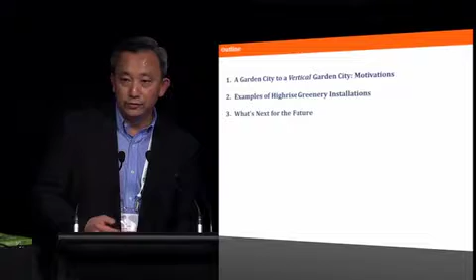What I'm going to talk about next is to share a few more motivating factors why Singapore is pushing for the greening of the city. I'll next talk about some examples of what I think are good examples of high-rise greening in Singapore, and lastly I'll share some perspectives of what I think the future could hold for high-rise greening in Singapore.

Now, Singapore to me is unusually green. I say it's unusually green because Singapore has a very tiny landmass but a very high population - current population is 5.5 million. In fact, we're talking about a population of 6.9 million by 2030, and some even suggest we could hit 10 million by 2050. It's a huge increase in population.

The other pervasive feature of Singapore is roadside planting. We estimated that more than 95% of all roads are planted with trees, large and small. This is a very effective way of making sure the green ambience is pervasive, because roads are everywhere in Singapore. So if you green up your roads, you get a very green atmosphere within the city.

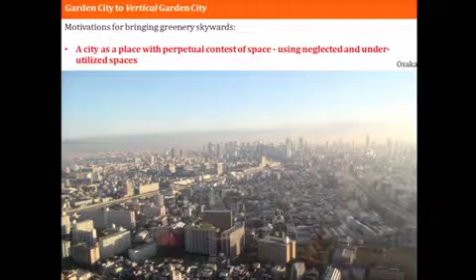I mentioned the need to overlay different functions on a roof. This is a picture I took in Osaka, probably similar to many cities. Osaka is a megacity, and you can see one example of a green roof on top of a building, but many buildings still have very bare rooftops. It's the same in Singapore, and perhaps in many large cities worldwide.

So there are a lot of spaces we can use. I remember Stephen Peck wrote many years ago that the rooftop is the last urban frontier. That's a space that's underutilized, and there's a lot of focus on how we can use it more effectively.

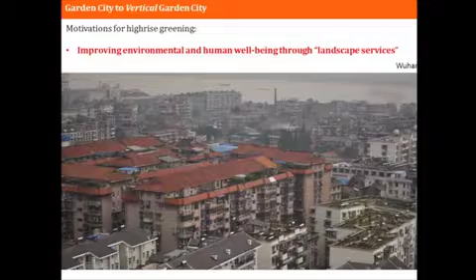The other reason we're pushing for high-rise greening is really an indirect benefit of green. It delivers a suite of ecosystem services, which I tend to call landscape services—useful to improve the environment and contribute to human well-being, both physiologically and psychologically. This is a prominent and important objective, complementing what we have on the ground to use green spaces as a medium to improve the environment and human well-being.

The last reason, which is important for Singapore, is that we are trying to correct past mistakes. Singapore, before it was founded as a British colony, used to be covered almost 100% with primary rainforests.

And thanks to the mismanagement of our colonial masters, within 100 years from the founding of Singapore, we lost more than 90% of its primary forests. By now, Singapore has only about 0.3% of its primary forest left intact. Obviously, with that tremendous loss of primary forests, we had a great, catastrophic extinction of biodiversity within Singapore. The issue now is to conserve what we have by safeguarding the nature reserve, because that's still a rich source of biodiversity.

But the city and the built-up area—and I listened to a presentation on biodiversity conservation and enhancement with green roofs in the earlier session—the city is also looked upon as a space where we can introduce habitats to conserve and enhance biodiversity for the whole city. This is a very strong factor that is going on for Singapore at the moment.

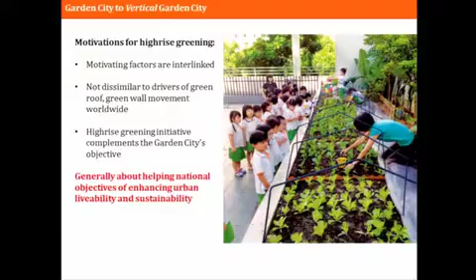So the motivating factors I have presented individually, but they are obviously interlinked. If we scan the range of driving factors that push the green roof and green wall movement worldwide, they are largely the same. The priority of importance given to factors may differ, but I think the suite of factors is generally well understood.

So in short, greening Singapore upwards in a high-rise environment is really a means to help achieve the national objectives of urban sustainability and livability.

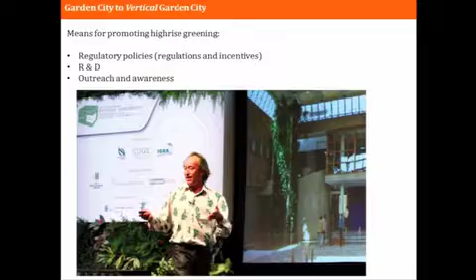Now, how do we do it? A range of policies and incentives have been put in place. It's both a carrot and a stick approach—Michael spoke about it yesterday, same as Faisal. We also, in the initial years of pushing for this, had to conduct a range of research to look at how we can contextualize benefits to Singapore's conditions, and also to overcome some of the technical barriers to implementation.

Now, the other way is outreach and awareness. Those of you who heard Patrick Blanc's presentation will probably agree that he speaks with conviction and passion, and it's very useful to have a person like him to influence politicians. We invited him, for instance, to speak in Singapore in 2011, and quite immediately after that, almost literally, he was hijacked by the largest property developer in Singapore—that's how he got his first commission project, which Michael talked about yesterday. So it's useful to bring people who can inspire and influence, to get to influence politicians.

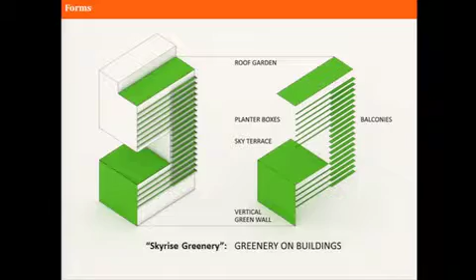Now, what is high-rise greening, or in Singapore we call it sky-rise greening? It's actually a unique term, but Hong Kong copied it and started using sky-rise greening too. The term originated in 1992 when we first held an exhibition to demonstrate greening of the high-rise environment. High-rise greening in our terms refers to green walls, sky terraces inserted in intermediate floors within buildings, planter boxes, balconies, and of course rooftops. That's what I mean by high-rise greening.

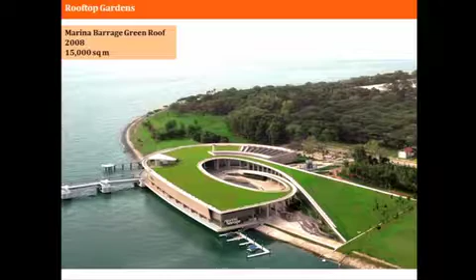So I'll show some examples. This is an example I talk about—15,000 square meters, large, implemented in 2008. A fantastic public open space—you can see the ramp that leads up to the top of the roof, so it's a very attractive place. The palms I mentioned are housed within this facility.

The engineers were terrified that with the kind of torrential downpour we have in Singapore, the slope will fail. We pushed through, and I'm very glad that, in fact, it's coming to 10 years, and nothing has happened. It's still a green roof, performing pretty well, and students can walk up the roof to their classrooms.

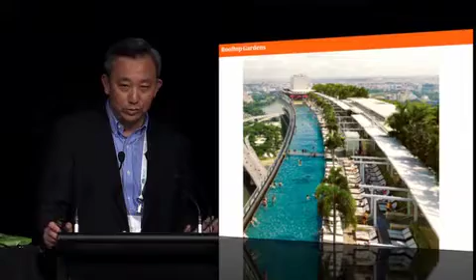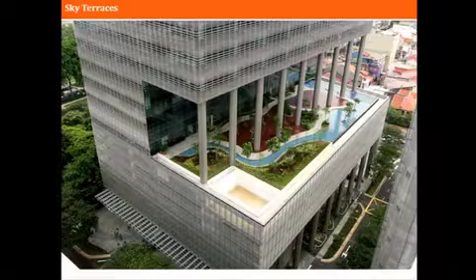This is quite a good idea because at lunchtime, it is hot and sweaty in Singapore. The rooftop garden is not a space that we want to use. So a somewhat sheltered environment is much better, and this is proliferating in Singapore at the moment. Okay, an example of what it looks like. Unfortunately, I think some spaces have turned into a secret smoking corner.

And he has also made sure that he has allocated some space for a community garden for the residents who are staying within the vicinity to use. So it's a fantastic place.

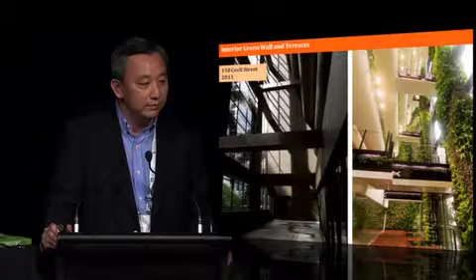But once the green has been put in, it becomes a very desirable place, and the building owner could recoup a lot of his investments from just tenants who are facing the green atrium. So it's a good example of how, if you implement green in a strategic fashion, you can have some business returns.

And apparently, as well, Facebook has an operation in Singapore. So the co-founder of Facebook, I can't remember his name. There are a lot of rich and famous celebrities in Singapore now. He liked it so much, so he commissioned the landscape contractor to do a similar wall on top of his office right at the top of the building.

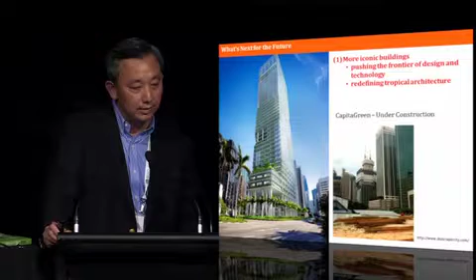So there's a movement going on now, and this is one example of a building under construction, CapitaGreen, with green planters and balconies, and also sky terraces that are inserted in different floors. This is designed by Japanese architect Toyo Ito. In fact, Toyo Ito said this is the office of the future, one big tree.

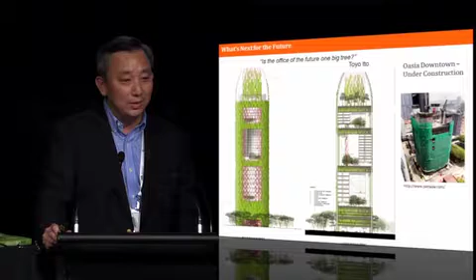And I think his quote is perhaps more suitable for this building, again designed by our local architecture firm WOHA. It's fascinating. I am not sure how the landscape contractor, who is also here in the conference, I have not seen him today, is going to implement this, but I think it's fascinating to see what the outcome will be like. Right? And you can see the building that's being constructed over here.

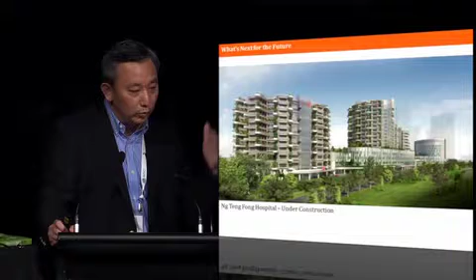Another hospital that's coming up, perhaps to be completed and commissioned within the next 6 months, is the Ng Teng Fong Hospital. Again, the idea that green is important for the recuperative function has been gaining acceptance in our hospital industry. And the CEO here wanted to make sure that every patient in the hospital would have a view of greenery when he looks out the window. Right? So this was done by inserting lots of terraces where the windows are. I think there are some design functions to use the green to mitigate glare. So the green is also a shading device for the building.

Now, the second main trend that I think is going to happen here is that instead of having isolated buildings with perhaps some wonderful examples of high-rise greening implementation, the movement now is going to a district-based kind of approach where the master developer implements some urban design parameters that require buildings in the district to have high-rise greening.

So this is one example that has been implemented, perhaps the only one in Singapore, at the Changi Business Park, where almost every building that you see in this picture here has either a rooftop garden, sky terraces, or green walls within the building. So I think this is going to be a trend where we're going to take a district-based approach, and this aligns with the kind of national land use planning that's taking place in Singapore, for instance, in our Master Plan 2014.

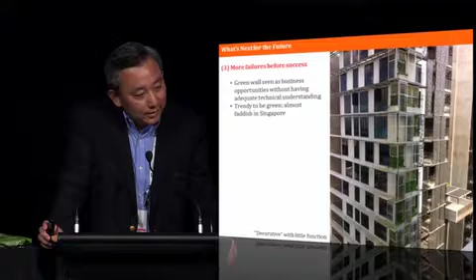Now, the third thing that I see happening is that we're going to have more failures. In Singapore, it's trendy to be green. And in fact, if you are a developer developing a residential complex, if you do not show enough green on your brochures and perspectives, your property may not sell very well. And to me, it has gone to a level where it is almost faddish. And what are the consequences? So you see examples of buildings like this now in Singapore where I truly do not know what this is or is meant to represent.

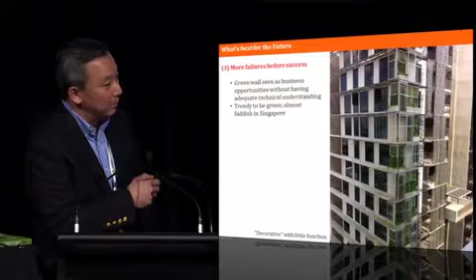There are some planter boxes, and this is a high-rise apartment in the university where I work, and creepers are planted. It's still a mono species. It's meant to creep up some mesh walls. But the positioning of the screen is perhaps not thought through very carefully. It doesn't have a thermal insulation function because it's not shielding any part of the building that gets the western sun. It doesn't look very nice. Now I put it as semi-decorative, but it has very little function. And why it has been approved and why it's done escapes me.

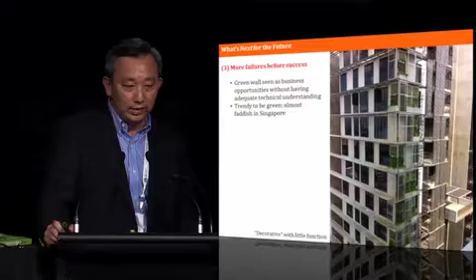But this is, I think, one example of a design that's not meant to be repeated. We also have fairly impressive installation like this, where you can see a green strip running up the whole building. This is fairly a large installation. But again, I really question the function of such an installation. It costs money to do this.

The green actually shields and covers an open ventilated stairwell, which is an emergency staircase for the building. It doesn't have any shading function because it's open ventilated. Nobody is staying within that space, so the energy conservation function is very minimal or non-existent. In fact, I think it compromises daylighting within the stairwell because now we probably have to turn on the lights to achieve the performance requirement.

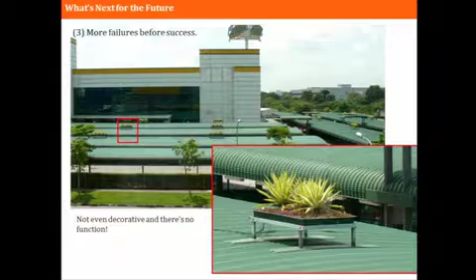This is another example, and I think this is classic. I think this is probably a good example of illustrating how to grow bonsais on roof. It's definitely not decorative, and there's no function I can see, and I'm not sure whether Stephen is in the room. I think the person who designed this, as well as the person who approved this, should be sent to Stephen's Green Roof 101 course.

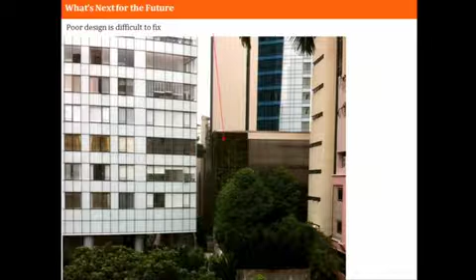But that's happening, so it's just hilarious to see this. This is a very high-end, prestigious development in Singapore. You can see this green wall is black because the plants are dead.

High-end is a 6-star residential development within the shopping district of Singapore, but it has failed. Obviously, for high-end development, you can't allow a failed green wall to be there for a long time. So you can imagine that there will be repeated planting, repeated rectification to get the system correct. But these are costs. They are costs not just to developers, they are costs also to us in terms of material use.

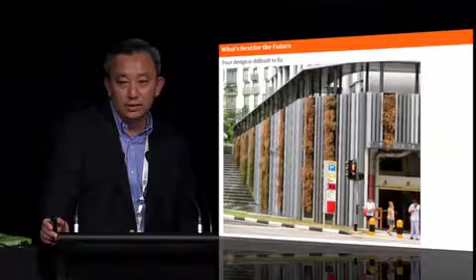Examples of other kinds of failures that we see in Singapore. In fact, I would not think that this system is maintainable. Once the plants have died, you just have to replant and let them grow up again. It probably takes half a year. In Singapore, everything grows very quickly, but you still have to go through the effort of replanting, and there's no access from the back to maintain the green screen.

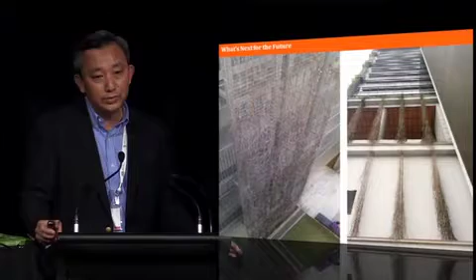This is an example within the university. Again, it is very ugly when plants are dead. So there are expensive failures that have been happening in Singapore.

Failure because of poor choice of design. In Singapore, it's definitely a no to use organic matter as a screen to retain growing media, because the organic matter will rot very quickly in our tropical environment. It's a poor choice of material, and it's very expensive to fix. And this is where there's meant to be horticulture excellence, in the Singapore Botanic Gardens.

This is my last slide. I would like to summarize. One of the things I've been observing and advocating here is that we need to be conscious that all forms of greenery require resources to install and maintain. Because of material use, there's an ecological footprint to materials that are being used. All the materials used for green walls, even recyclable materials, need energy to produce them. So there's also a carbon footprint and an energy footprint.

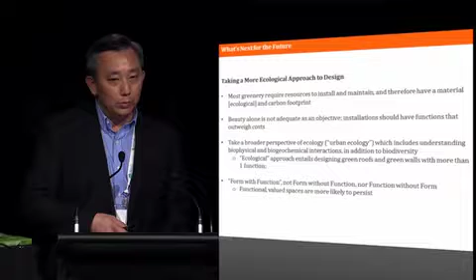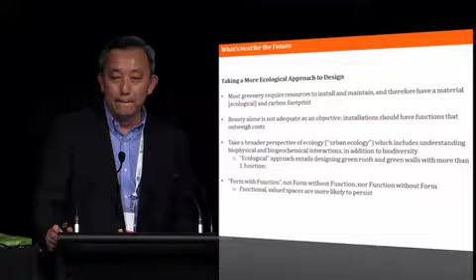If we want to push for high-rise greening of whatever forms, beauty therefore cannot be the main objective for installation. Obviously, I'm not saying that beauty is not important, because I'd offend a lot of designers among the audience and also my colleagues who design. But beauty alone doesn't bring out more functions unless the design has been thought through very carefully.

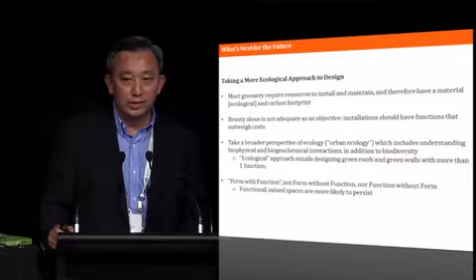The approach that I am suggesting is to take a broader perspective of ecological design. When we talk about ecology, I'm using it in the perspective of what is known as urban ecology. When designing a green wall, you should take into account not just biodiversity, but also the invisible flows of materials and energy within our environment, and integrate that so that your green wall and green roof becomes a bioengineering solution to complement traditional engineering solutions.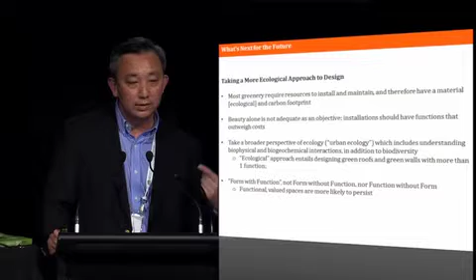One example is to install green walls that, in addition to providing green benefits, also integrate the water cycle within the building so that it can clean the water coming out from the toilets, using the phytoremediative properties of systems to treat the water, recycle it, and reuse it for irrigation. This is already developed in many cities, but in Singapore, we're still far behind in terms of system integration.

Julian showed the example of using plants within a sort of greenhouse condition on top of a roof to treat exhaust from buildings that is contributing to air pollution in Madrid, Spain. That's another example of using integrated systems to deliver more than one function.

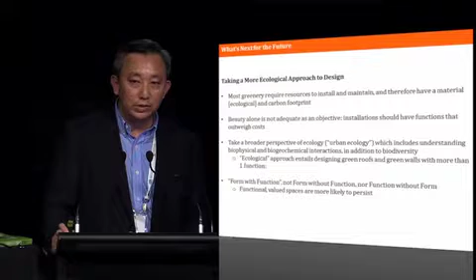So really, it is about beauty with function, or form with function, and not form without function, or examples that show something with no form and no function. Yeah, thank you.

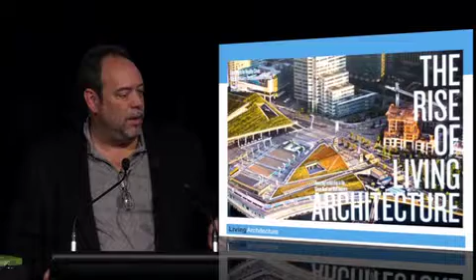Really, the rise of living architecture, I think, is a wonderful point in time to begin. I've never given this presentation before, so I have no idea what I'm going to say or the rhythm. I have no rhythm to this. But we started in 1981 working on what was then considered rooftop gardens, and it just fascinated me, trying to adapt an organic living form to a very rigid engineering structure, and the challenges behind that sort of endeavor.

This particular project was pretty unique because it was a parking garage that sloped down a couple of stories. On one side of the site, I had a planter box that was 37 feet deep. On the other side of the building, I had a planter box that was 6 inches deep. So it created its own little challenges and uniqueness.

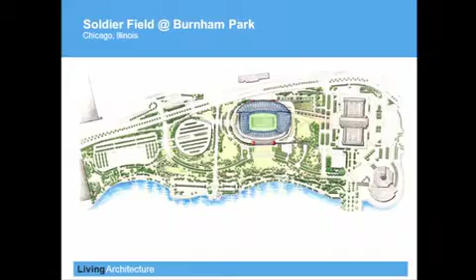Probably one of the more interesting ones that we started was the renovation of Soldier Field in Chicago. The old 1932 Olympic Stadium required a renovation, and they really looked at greening the entire facade, the peristyle, and most of the parking lots that surrounded it. The plan was to create about an additional 12 to 15 acres of green space in the heart of downtown Chicago, and about 5 acres of that was on deck on top of a parking garage.

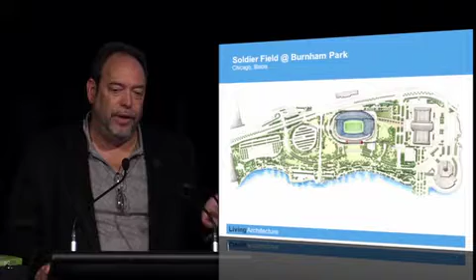The parking garage is here, and it was about 2,500 cars. The problem was they wanted to create a promenade between the Science Museum and the stadium itself, but there was a 90-foot grade elevation. So we had to build up grade on that deck, which included about 35 feet of foam concrete and about 35 feet of expanded foam. That would get us up to the elevation where we could create a seamless park between the two.

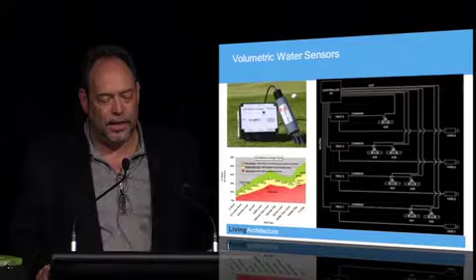It was one of the first opportunities we had to really look at water movement and water sensing, so we disposed of ET, or evapotranspiration, as a control model for soil moisture, and installed volumetric meters throughout the soil so we'd get direct readings instead of inferred readings of soil moisture, allowing us to be more exacting in how we controlled those systems. We were able to really understand how water pulsed through the soil profiles and how saturated flow would work, which gave us insight we could build on in the future.

Here you can see they're finished with the foam concrete, and they're starting to put on the 5 acres of expanded foam, which was sort of interesting.

Every week we would get a construction photo showing the progress. I got the one from April and it looked fine, and I got the one from May and it didn't look so fine. It looked like an older photo, so I looked closely and realized most of the foam had disappeared off the deck. Come to find out, they had a shear wind rip through Chicago Sunday night at about 75 miles an hour, and it picked up 5 acres of foam and took it into the lake.

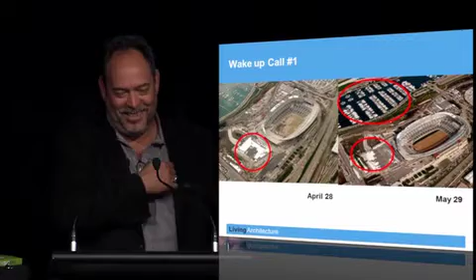These were big foam blocks, 4 by 4 by about 30 feet. As they cartwheel across the landscape, they tend to chew themselves up pretty good and are no longer serviceable for bulking. So the lesson learned was basically that we've got one heck of a ballasting requirement during construction now, that you need to secure this stuff to protect it.

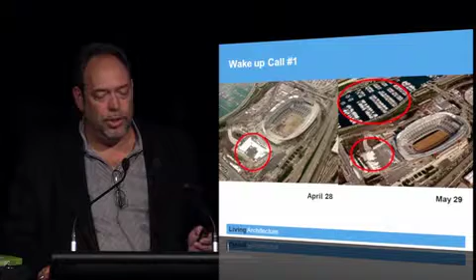It was quite fortunate that it happened Sunday night and there was no one on site, but it was one of those situations you sort of wake up in a cold sweat over.

We had one-to-one slopes on this, and a very elaborate system of reinforcement of soils, working with the nature of the soils, a very good solution that had never been constructed before. So we went out on site, and we had a very high bulk density requirement on the soil so it would be stabilized in place.

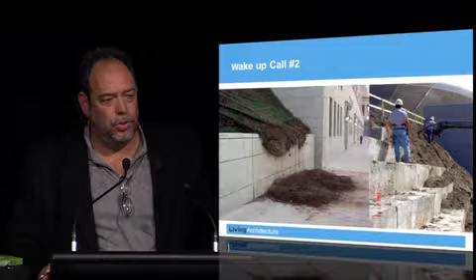We had a 95% proctor requirement on those soils, and there were 2 guys standing out there with shovels hitting that soil as it went down, and it's like, we're not going to get 95%. Oh, it'll be fine, they said. Then they had a pretty severe rain event, and we did the testing right before this, and they were only about 35% proctor, so it was still pretty fluffy.

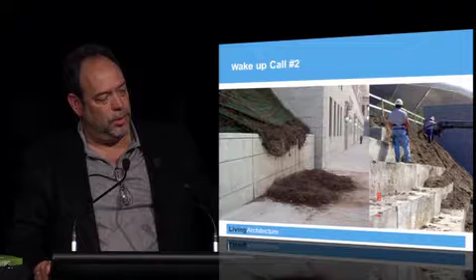That rain event supersaturated and liquefied the entire slope and took it straight to the ground. It's funny, when you have these construction issues come along, all of a sudden you get a couple hundred emails in the matter of an hour or two, and a lot of curiosity and stuff you'd never hear about otherwise.

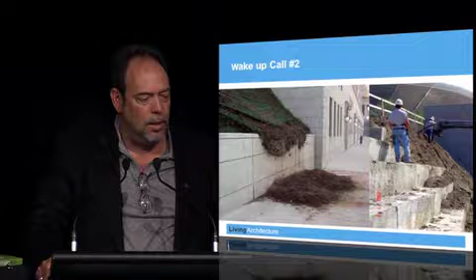We had a solution, and even though we'd specified a rational methodology, we couldn't identify another locale where it had been done before. What we wanted them to do in pre-construction was build up a cofferdam system, compact it on the way up, build the cofferdam, and then take it out and plant it on the way down.

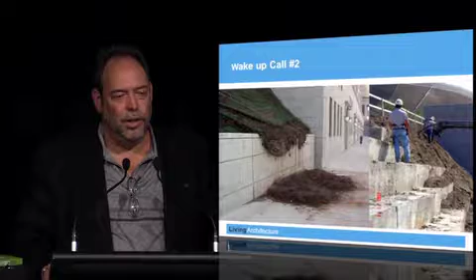The initial contractor selected for this was over $1 million cheaper than the next lowest bid. We tried to consider them non-responsive, and they said, we can fix a lot of problems for $1 million, so here we go.

What was interesting was at that point, as a landscape architect, I was no longer relevant in the solution of the project. They brought an engineering firm out to engineer the slope solution, the cellular system. You can see their solution, which seemed more than adequate, with the exception that their system failed.

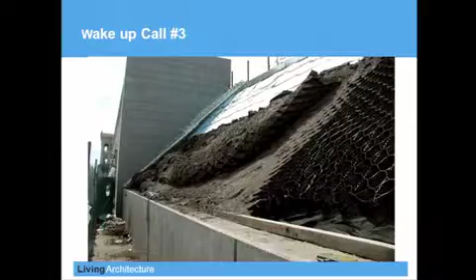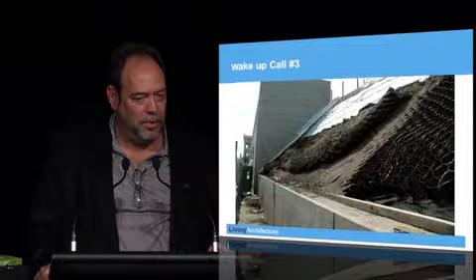So engineering team A got sent to the bench as they brought in engineering team B to re-engineer the slope again. All I can tell you is that if you're worried about a nuclear strike anywhere in the Chicago area, I'd go under that roof, you'd probably be protected based on what we saw. They replaced the system and really reinforced it.

The lesson that came out of this is that it's difficult in a competitive, public bid environment to get qualified people when they're unwilling to reject unresponsive bids. They left $1 million on the table, and I think when it was all said and done, that particular contractor cost them about $3.5 million along the project. So it wasn't that hard to spend the $1 million to catch up.

When you look at this, it's pretty easy to tell who's going to get the contract. It's the guy that didn't go out and buy all the really expensive equipment that would prevent him from actually dying on that site, probably.

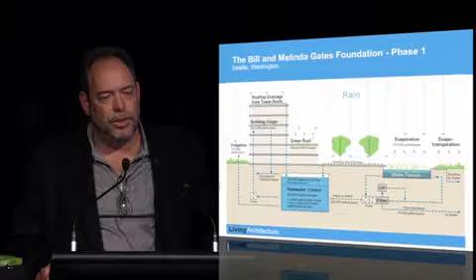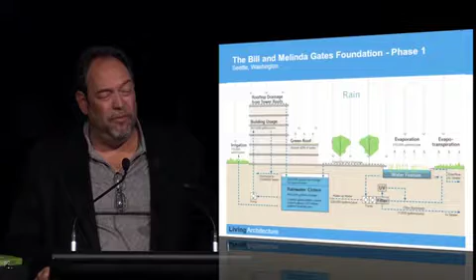Another fascinating project was the Gates Foundation project, which was just completed a couple of years ago. It's a pretty fully site-integrated water system. We're collecting water from all of the surfaces, the roof, the permeable pavements, all the hard surfaces, and it's supplying 100% of the irrigation, 100% of the water feature, and it is also supplying the vast majority of non-potable interior water. So it's a pretty integrated system in that regard.

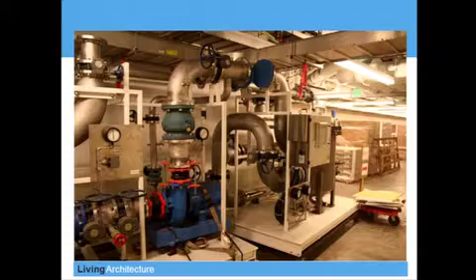It's got some significant engineering to move all that water around. The cistern in the bottom of the building was, I think, about 800 to 900,000 gallons, and it zeroed out pretty well. You can see some of the construction here as it progresses, with some of the distribution piping to move water around. It was about a 6-acre site, all on deck.

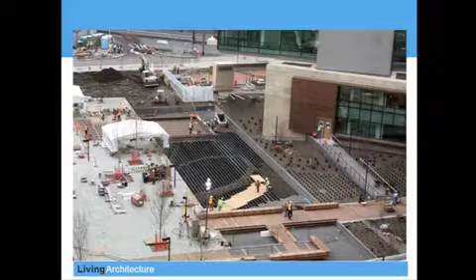That's the polishing marsh area that would become one of the water features. So the water feature was also utilized to polish the water and cycle through the cistern.

So the other lesson I think is important from this type of project: just because you've designed it within budget, got it agreed in budget, bid it and got it on budget, and it's going along, doesn't mean it's not going to be taken out of the project. There's this constant tug of resources throughout the project that always tends to put the landscape in jeopardy. It seems to be always expendable in terms of its requirements.

So I think you always have to advocate continuously to ensure that it's going to be built, because we've had lots of projects where you get all the way to the end and they're running short, and it's the landscape. And in 35 or 40 years, they say we'll put it in later. I've never seen anyone put it in later. So that's beyond my timeline in terms of what they can do.

Some examples of the project. We work primarily as a consultant to the designers. Soldier Field was Peter Schaudt's office out of Chicago. The Gates Foundation is GGN out of Seattle.

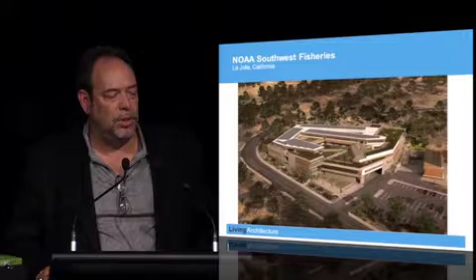It was the most incredible client you would ever want. 275 researchers who research the environment and follow migratory patterns of fish. Every time you thought you were pushing the edge, they would challenge you to do something even more creative. The structure was very large, and it was an extremely difficult site. They had about 300,000 square feet of program on a site that sloped 120 feet.

So again, someone else will need to make the conversions for me. But it was created in such a way that it was tucked into the facility, and it was one of the very few remaining native areas within La Jolla. It had been disturbed, but it still had some interesting ecology and ecotones in there.

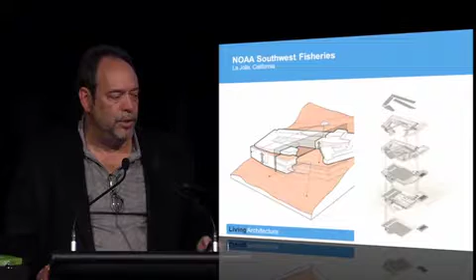Part of our solution was to go out within the dune community and harvest endangered seed. We did a mock-up, about a 1.5-year mock-up, where we tested different seed varieties to get an appropriate mix for the system. Again, because of the sandy nature of the beach environment, we were able to achieve a total zero-runoff stormwater site.

Between the harvest and the nature of the site, regardless of the event, we wouldn't have any further water running off. That was an important issue, being as close as we were to La Jolla and the La Jolla Trench.

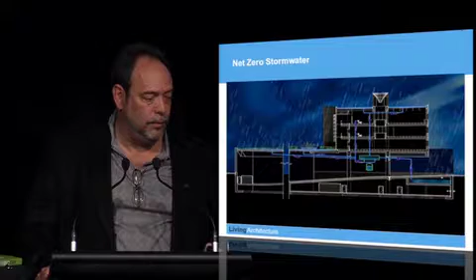Again, a lovely place to work. Beautiful building. The architects on this was Gould Evans out of Kansas City.

But the thing you learn is that we deal in a different science than construction does for the most part. We deal in agronomy, and they deal in engineering. And agronomy and engineering are two separate and distinct sciences. Our sieving is different - we use wet sieving, they use dry sieving. Our measurements for compaction are different. So what you find is that it's very difficult, if not impossible, to achieve agronomic performance by only using engineering methods. Everything out on site is measured typically in engineering methodology. So it's the idea of starting to incorporate agronomic testing as a methodology to ensure that you're going to get the right solution out of that.

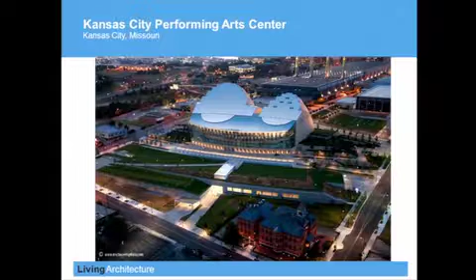Another project that was completed this past year, Moshe Safdie building. We worked with Reed Hildebrand out of Boston on this Performing Arts Center, which is about 5 acres on deck for the new Performing Arts building in Kansas City. What was interesting there was stormwater, and we had to sort of fight the city in terms of the stormwater detention facility, which was going to cost about $500,000 to put a big lovely hole on the side of the site.

So when it rained it would fill up and drain off. So we took our green roof into the lab and we began to model its performance. We took it to field capacity and looked at the worst case scenario, saying that if this was at field capacity and it rained, what sort of impact would we have on the 100-year flood? And if we could demonstrate a positive impact, maybe we could take it to the city and talk to them.

So we set it up this way. We did 3 1-inch 20-minute rain events, or 3 inches over an hour, which was getting close to our 100-year frequency. Then we measured accumulated discharge. What we found was that in a saturated soil, in a field capacity soil, we held half of the 100-year storm for 12 hours, and we held a quarter of it for 90 hours.

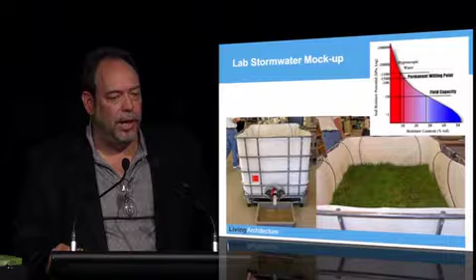So the post-development stormwater was calculated at about 65 cubic feet per second. The city wanted to achieve pre-development hydrology, which was about 35 feet per second. And when we used this number in the engineer's model, we were down to 5 feet per second. So we were 7-fold under the city guidelines.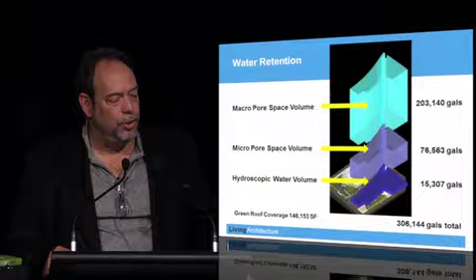So what was interesting, we looked primarily at water within the soil profile in the different phases. Hygroscopic water is bound up - it doesn't mean anything to the plants or to stormwater. The micropore volume or capillary moisture is where all the plants draw from, that's sort of matric potential there. But you look at the large volume of pore space, and that's really storage. You can fill that up, and it's sort of a tortuous path that takes time for it to empty.

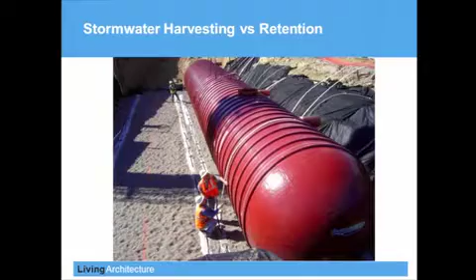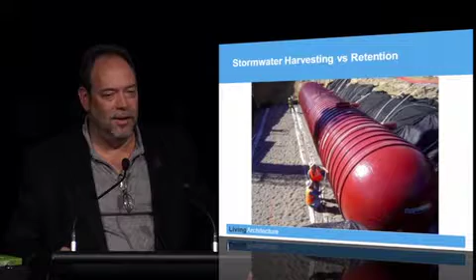Those always surprised me. You know, you're drawing them on your desk, and you do all your calcs, and the piece of paper's about this big, and then they pull them up on site on a big semi, and it's like, whoa. I'm going to go check my calcs.

So, Moshe Safdie building, a spectacular building. Unfortunately, the architect wanted a bit of a monoculture there in order to highlight the architecture. We had a big performance lawn out front that we had to fight to keep. I just - you build a $400 million performance art center, and you're going to put a parking lot out in front of it? No front yard to this building. Sort of scary. But we had to justify this a number of times.

And we got a 6-inch rain event that came down off the roof, jumped the lifts and elevators, and flooded all the mechanical systems in the bottom layer. And it was like, you guys got a bad design there. And it's like, no, we don't. We have 6 inches of soil which would buffer runoff. It's a case that the site wasn't protected during construction, and the runoff on foam is much different than the runoff on soil.

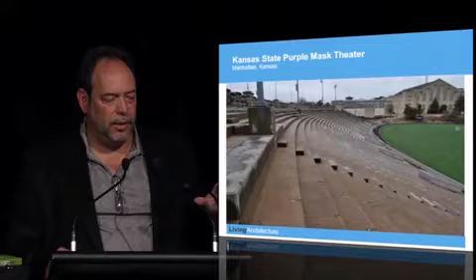Fabulous project, Kansas State Purple Mask Theater. It's the old football stadium for Kansas State Wildcats. It was decommissioned in the 70s. It's a rec facility. And the structure was getting tentative enough that they couldn't put mass crowds out there. So we had a solution to cover it with a green roof and leave a small portion for seating.

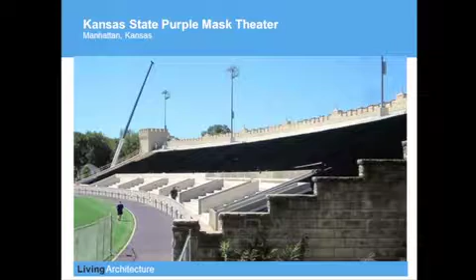Fairly spectacular. We were emulating the Konza Prairie in terms of the plant matrix, and the Kansas State Purple Wildcats was prominent in the color system. So things are coming along. We've got our cellular confinement system. We're starting to load it with soil, 6-inch profile, and the whole thing slides off the structure.

It's my project manager. We were there when he opened the email, took a look at it, and all you could see him do is, and it's like, we've been through this before. Knowing we've been through this before, we worked the numbers and reworked them, and we had the right solution. But in the design build calculation for the confinement system, they transposed their numbers.

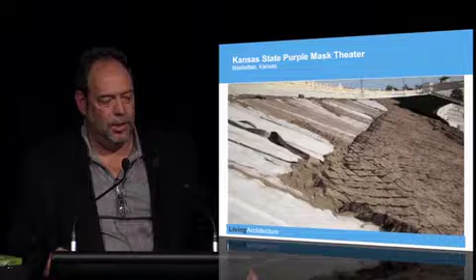So our loading was 62.5 pounds per square foot saturated weight. And they ran their system with 62 pounds per cubic foot and doubled the tension. So it immediately got us concerned on a structure that was built in 1926 that could only hold 6 inches, that we now had areas of soil that were starting to approach 30 inches. And there was no way to really do that other than to take shovels and buckets and clean that off the roof, which has taken about 3 weeks.

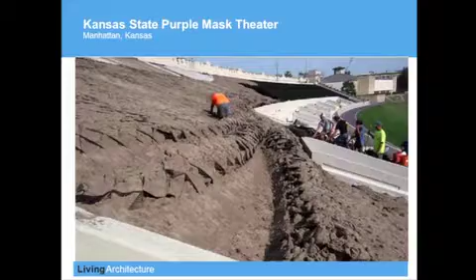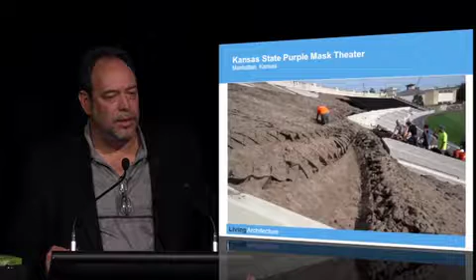So we're in the process of re-engineering. Once again, we're sitting back, and the engineer, who we hope will successfully navigate us through this, we're looking at a different tendon cabling system for this. But I think the point is that you can do everything you can do and be right in the solution, and there's problems growing up in the process that will trip you up. And this was a miscommunication between the subs on the project.

We had a protected membrane system. The structure was so deteriorated we couldn't get adherence of the hot asphalt. So we had to convert everything to a conventional roof system. And we had 2 layers of protection board, and they didn't submit that back to the manufacturer to get the right friction factor. So besides the transposed numbers and the wrong friction factor, we were fortunate enough that it failed before they got much further. But it tends to work out.

And you understand when you're looking at this, it's a fragmented system. You're having people design multiple layers of this, and none of them may have the complete understanding that you have on how these interwork and interrelate. So I think it's important to look at those.

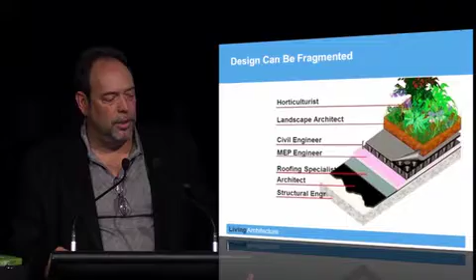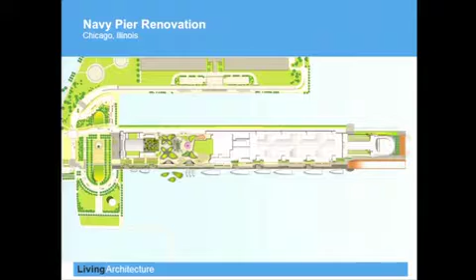Last one I'll talk about is Navy Pier, which is in construction now. This is a Field Operations project. Sort of the High Line on the water. Pretty interesting project. There was no greenery out there to start with. And what's interesting in this is that pier stretches a half a mile out into the lake. And we did a lot of integrated water in terms of that.

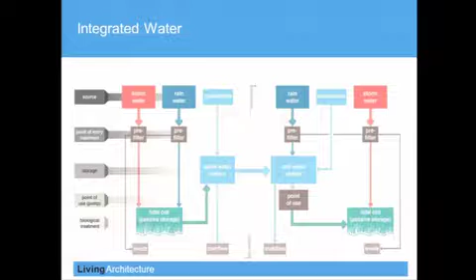It stretches a half a mile out into the lake, and we have to drain. They put in pots for the big trees. So they cut into the structure, dropped in pots that sit only a couple inches above water level. Can anyone figure out what the real problem is? We can't drain into the lake. So we have to take a pipe a half a mile onshore with no slope. So we made up a concept which was tidal pulsing.

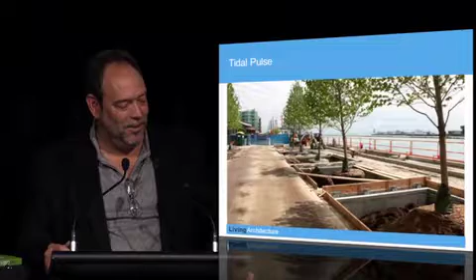We'll see how that works. But we created a sort of a tidal pulse and created the hydraulic conductivity that one day that water will make it out. They are maples, so I think they're tolerant of a little bit of inundation now and then. But there's challenges in all this. This is phase 1 just being completed.

But I think what is important, what I wanted to really share with you is when you get into groups like this, there's a common understanding and a common goal and direction about what we're trying to achieve. But so often is the case in these meetings, I'm the only guy beating the table, saying we can do this and demanding that we do this. And it's at risk because some of these, there's a certain degree of sadism in the fact that, yeah, I told you that we didn't want to do this, right?

But until all of us take that courage and stand up and beat the table and be advocates for this, the amount of inertia will stop these projects. And it takes some guts, and it takes some stamina, and it takes putting your reputation out there and living through some challenges in terms of that. But it's the right thing to do. And it's the only thing to do. And it's what we're here to do.